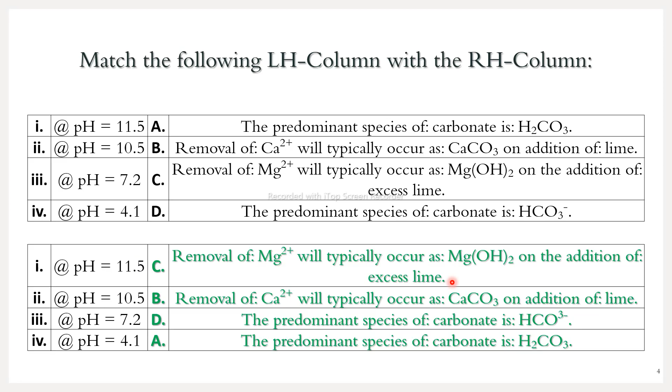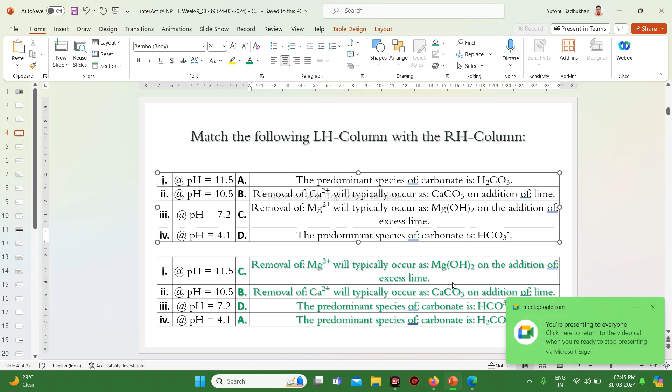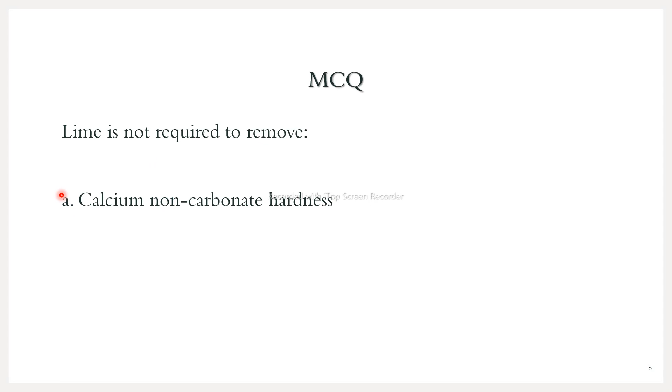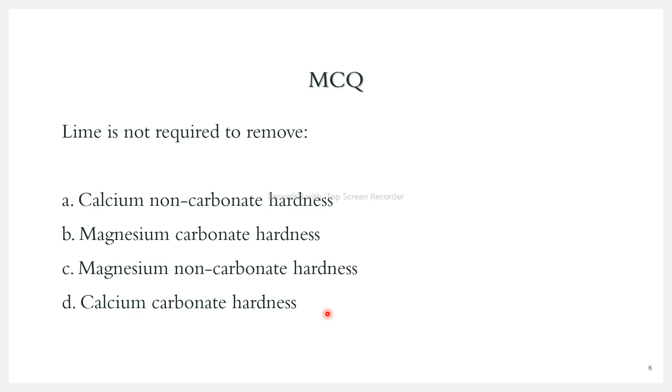Now the next MCQ is: lime is not required to remove option A, calcium non-carbonate hardness; option B, magnesium carbonate hardness; option C, magnesium non-carbonate hardness; and option D, calcium carbonate hardness. So the answer is calcium non-carbonate hardness. Lime is not required to remove calcium non-carbonate hardness, but in all the other cases - magnesium carbonate hardness, magnesium non-carbonate hardness, and calcium carbonate hardness - lime is required to remove these three.

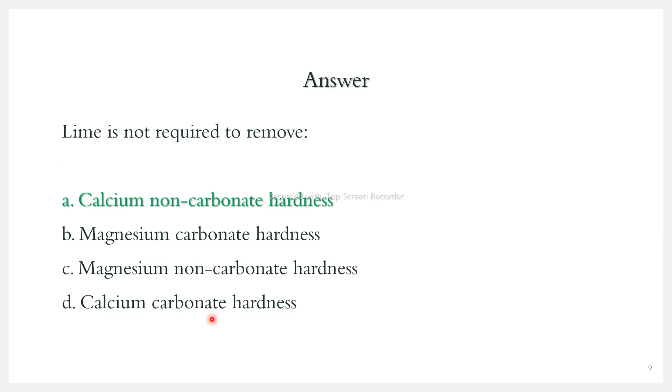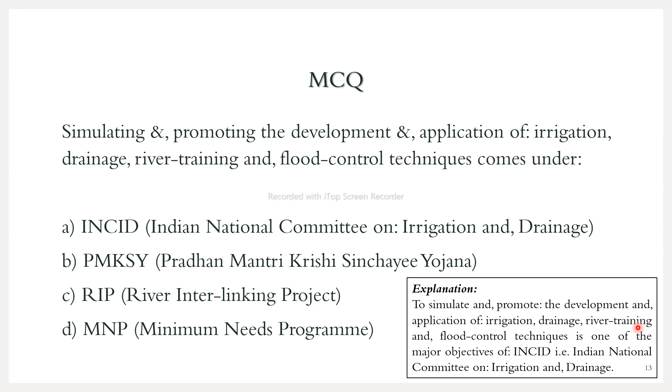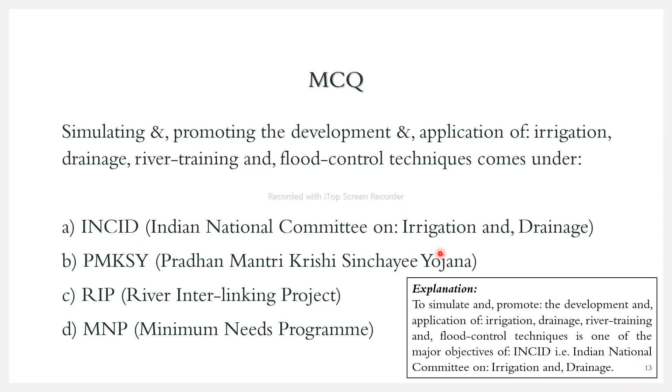The explanation is: to simulate and promote the development and application of irrigation, drainage, river training, and flood control techniques is one of the major objectives of INCID, Indian National Committee on Irrigation and Drainage. So option A is the correct answer.

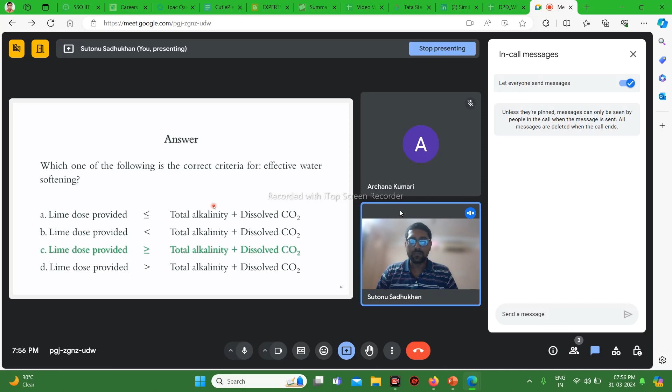Okay, I'll wait for some minutes for you to answer the next MCQ. Which one of the following commissions recommended to make water a union subject? Option A, Sarkaria Commission. Option B, Punchhi Commission. Option C, both Sarkaria Commission and Punchhi Commission. Option D, neither Sarkaria Commission nor Punchhi Commission.

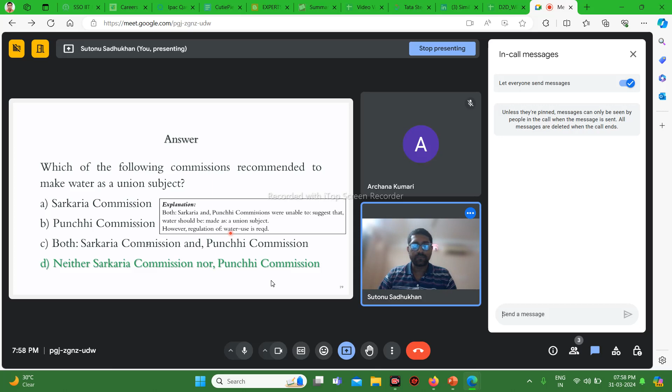Basically, water research or wastewater treatment is an interdisciplinary subject, not dedicated to any particular discipline. Okay, so now next.

Now you have to identify whether the following statements regarding NWP, National Water Policy, are correct or not. Statement 1: highest priority allocation should be for environmental needs to maintain environmental flows. Statement 2: water institutes should be restructured and made multidisciplinary.

So what is environmental flow or e-flows basically? If there is a river flowing from its source to the region where it meets the sea, and there is a certain industry or huge population located upstream, they will use up most of the water by putting up a dam or something for irrigation purposes or whatever. But what will happen in the process is the downstream portion of the river will get dried up. There might be other populations living on the downstream banks of the river.

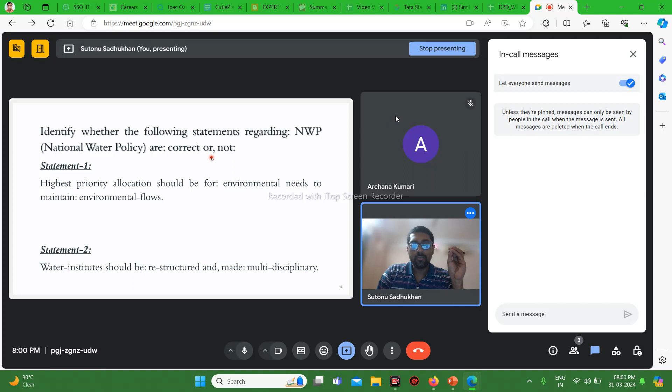Their livelihood is dependent on the water at the downstream portion, and the aquatic life will also be hampered. That's why environmental agencies have fixed that if the river has such and such criteria, with water flowing this many meter cube at the source, then at the downstream portion also a certain minimum flow must be maintained to maintain the livelihood of people around the river in the downstream region, and also to maintain the aquatic life there. So they put a limit that you cannot withdraw water from the river beyond this level, to maintain the environmental or ecological flow in the downstream region. So this is the concept.

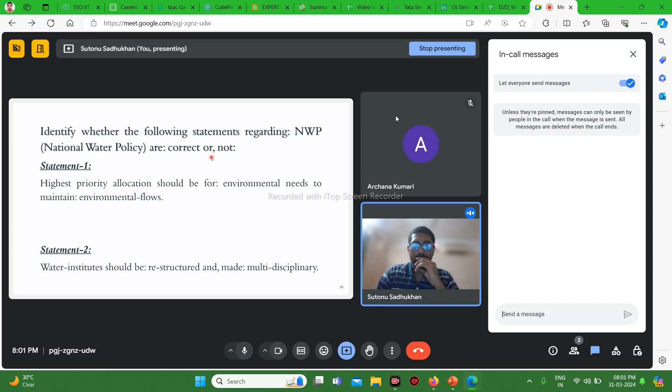And regarding the multidisciplinary concept, I told you water research is basically a multidisciplinary concept. Okay, so let's see.

So the explanation is, in the National Water Policy, drinking water is given the highest priority. So though option 1 is correct by itself, it was not part of the National Water Policy. As per the National Water Policy, drinking water has been given more importance than environmental flows, because national policies are made keeping public demand in mind. The aquatic life and everything, they are not going to give votes. That's why for such policies, drinking water, which is a public demand, has been given the highest priority.

But statement 2, that water institutes should be restructured and made multidisciplinary, this is a correct statement, stated in the National Water Policy. So next MCQ is: Jal Jeevan Mission aims to provide piped water supply to all the households across the country by option A 2024, option B 2030, option C 2032, or option D 2022.

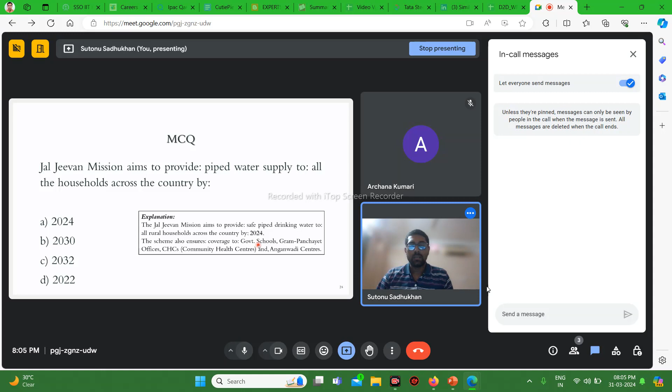Okay, so now our next. So for the Jal Jeevan Mission question, the answer was 2024. Within this year only, the Jal Jeevan Mission aims to provide piped water supply to all households across the country.

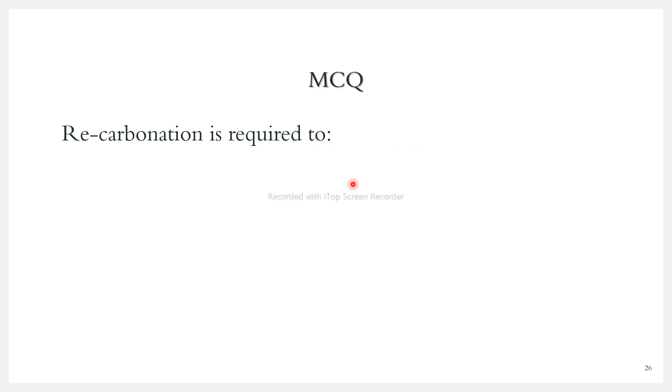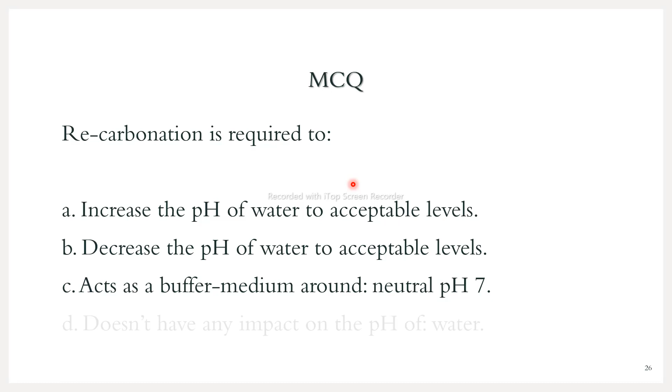Next MCQ: recarbonation is required to A. Increase the pH of water to acceptable levels. B. Decrease the pH of water to acceptable levels. C. Act as a buffer medium around neutral pH, that is 7. D. Doesn't have any impact on the pH of water.

So carbonation, this thing I actually discussed in one of the MCQs earlier when I was recording the initial class. Carbonation is when carbon dioxide is dissolved inside the water and forms carbonic acid, which is detrimental. Any kind of acid is detrimental to calcium oxide or things made of metals, so they are corrosive in nature.

So you can imagine if recarbonation is done, what will be the nature of the pH of the water. Please give me the answer, I'll wait for 2 minutes. This is a conceptual question, not a memory based question.

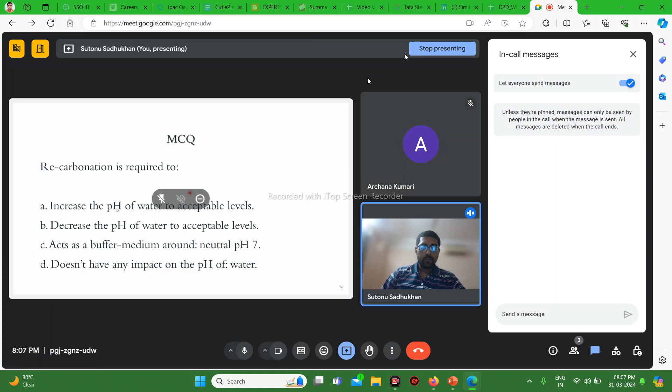Okay, so I'll proceed with the answer. So, decrease the pH of water to acceptable level. This is why the recarbonation is required.

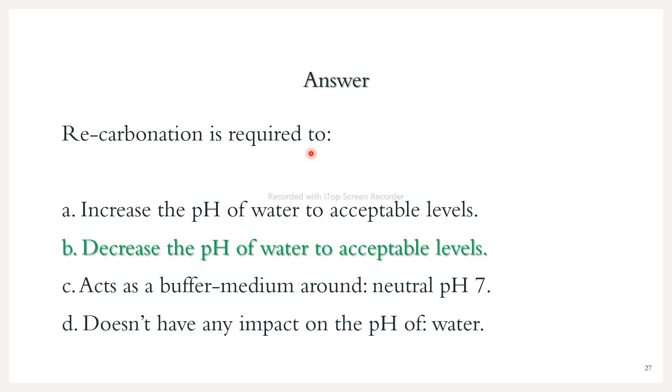Now next MCQ. In the Central Groundwater Authority or CGWA notified critical areas, groundwater development is regulated by A. Concerned deputy commissioners or district magistrates, B. Secretary of Irrigation Department of concerned areas, C. Principal Secretary of the concerned states, and D. Municipal or Panchayat authorities of concerned areas.

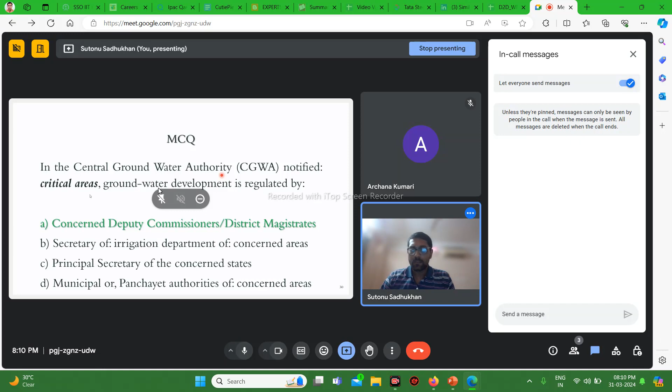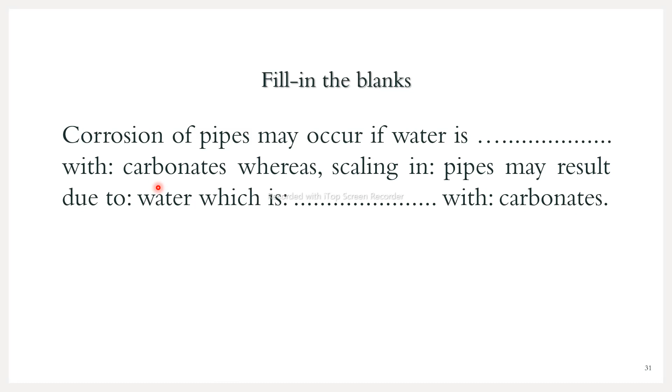Okay, so let's move on to our next, fill in the blanks. Corrosion of pipe may occur if water is dash with carbonates, whereas scaling in pipes may result due to water which is dash with carbonates. Option A, undersaturated and supersaturated. Option B, saturated and undersaturated. Option C, supersaturated and undersaturated. Option D, undersaturated and saturated.

Corrosion of pipes may occur if water is at what saturation level with carbonates, whereas scaling in pipes may result due to water which is at what saturation level with carbonates. You have to mention the saturation level. Carbonates in water may present at three saturation levels: undersaturated, saturated and supersaturated, right?

So if the water is saturated with carbonates, do you think corrosion or scaling will occur? What do you think? This is a conceptual question, I will wait for 2 minutes.

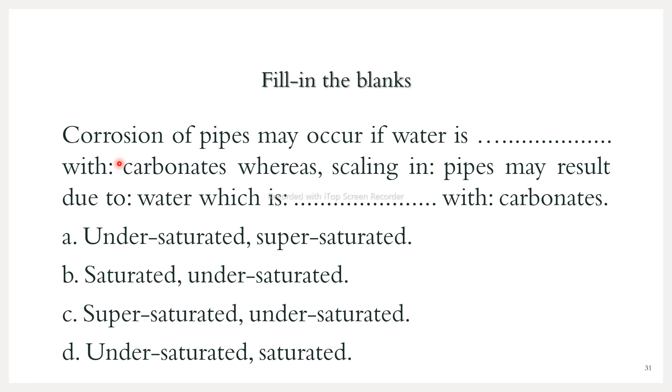Now let's say if it is supersaturated, oversaturated with carbonates, that means the ion holding capacity or mineral holding capacity of water has been exceeded. So the excess amount of carbonate will get deposited and scaling will occur. So now can you answer? Also no?

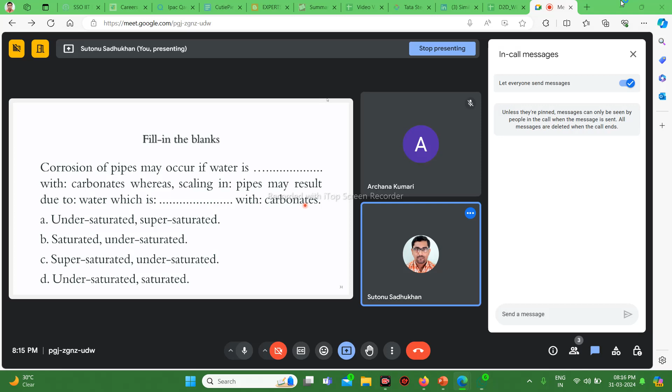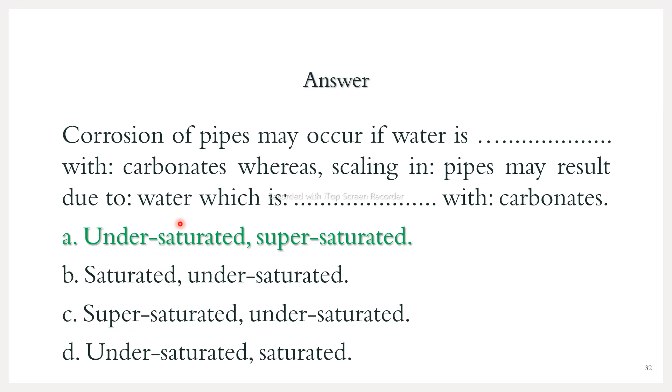Okay, so I move on to the answer. This is the correct answer. If the water is less than saturated, that is undersaturated with carbonates, then corrosion of the pipes will occur because the material of construction of the pipes will get corroded, and that will add to the water to fulfill its saturation capacity. And if the water is supersaturated with carbonate, the excess amount of carbonate causing the supersaturation will get deposited on the pipe, and the inner diameter of the pipe will get reduced as scaling increases.

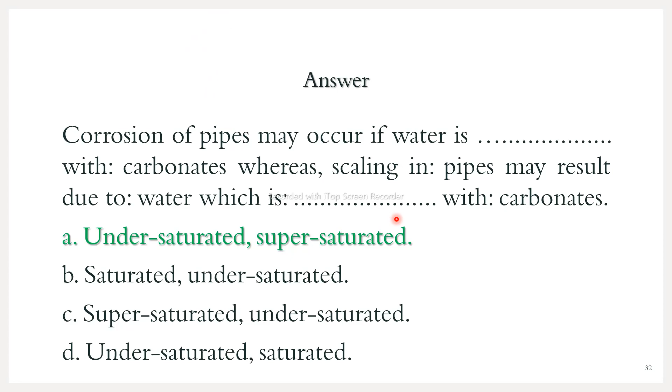Hope it is clear. So now next there is a problem. A flocculation chamber has 12-meter long and 0.25-meter wide paddles. Both the paddles are supported parallel to the horizontal shaft. The shaft rotation speed n is 6 rpm. Center line of the paddle from the shaft is 1.8 meter. Coefficient of drag CD is 1.8. The ratio of the velocity of paddle with respect to the water to velocity of paddle from a fixed coordinate, k, equals 0.75. The power consumption by shaft in watt, rounded to the nearest one decimal place, is what you have to calculate.

Now this is basically a formula-based problem. If you know the formula, you will be able to calculate; if not, you have to memorize it. There is a formula for power based on the power number, which is a dimensionless number, but the power number itself will not be discussed here—only the power formula will be used. So I'll wait for 2 minutes. Calculate and give me the answer, otherwise I'll move on to the solution.

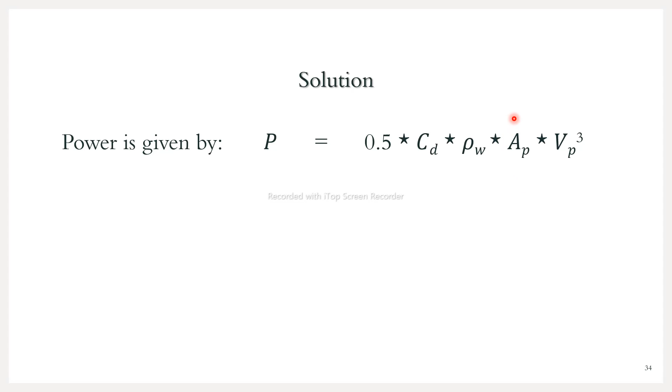So let me tell you the formula. Power is given by P equals half of CD into rho W into AP into VP cubed. CD is given in the question as coefficient of drag, rho W is given as the density of water, 1000 kg per meter cube. AP is the projected area, and VP is the velocity of the paddle with respect to the water. These data are given to you, so note down this formula: P equals 0.5 into CD into rho W into AP into VP whole cube. Power is directly proportional to the cube of the velocity of paddle with respect to water. Is the velocity of paddle with respect to water given in the question?

Yes, rotation speed in RPM is given, so from that you have to calculate the velocity of the paddle, or maybe with the help of K you have to calculate it. So I'll move on to the solution after 1 minute.

So you have to note this down: this is the dimension of the paddle, length is 12 meter, breadth is 0.25 meter. If you multiply them, it will be around 3 meter square area—that will be the projected area, AP. CD is given as 1.8, rho W is 1000 kg per meter cube, and with the help of these two you have to calculate the velocity.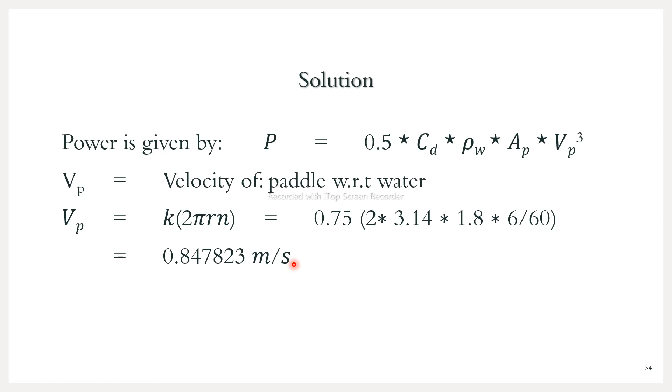So next, the projected area AP will be 12 into 0.25, that is 3 meters square. As I told, it is the length of the paddle and it is the breadth of the paddle. You just multiply them, and however it is shadowing the water, that is nothing but the projected area, 3 meters square. Because the movement of the paddle will be perpendicular to the flow of water, you have to take the perpendicular area to the direction of the flow of water. That will be your projected area, basically.

So now the power, as the formula gives, will be 0.5 into CD, that is 1.8, into rho W, that is 1000 kg per meter cube, into AP into VP cube. AP will be your 3 meters square, and VP will be... this cube. So it came out to be 3290.6 watts.

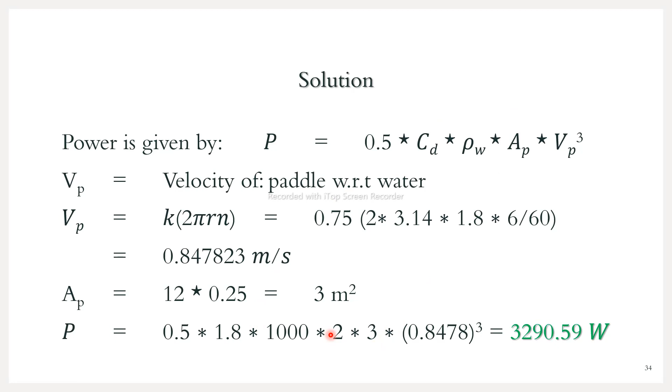How did these two come into the picture? Yes, because the projected area has two sides, so that's why. One paddle has two sides. That's why this came into the picture. Yeah. Thousand. AP is 2 into 3, and VP is this one. Right, so if you simplify it, it will become something like this.

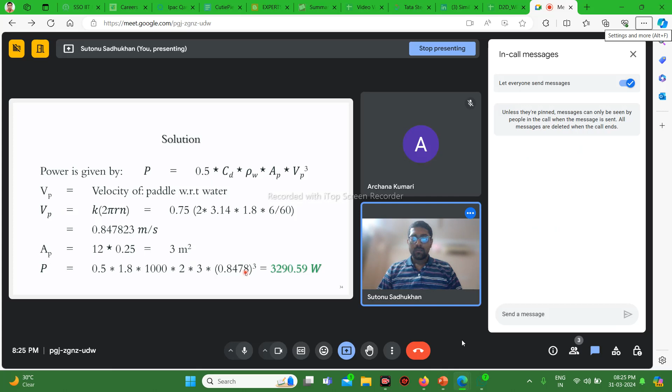So now the last problem of today's session. I told you I'll be letting you go at 8:30. So the problem goes something like this: a water treatment plant in a town is proposed to be expanded, so it is a brownfield project. Whenever there is a new plant being established, that is called a greenfield project. And if there is a capacity expansion of an existing system, that is called a brownfield project.

The new design flow rate is 1 meter cube per second. A deep bed granular sand filter with a design loading rate of 600 meter cube per day per meter square is to be used. If the area of each filter box is limited to 50 meter square of surface area, how many filter boxes are required? If the answer comes in fractions, answer to the nearest integer. Now it has another part: if one of the filter boxes is out of service, will the new loading rate exceed the design loading rate of the filter? This is the question.

So I'll wait for 5 minutes. Please calculate and tell me the answers.

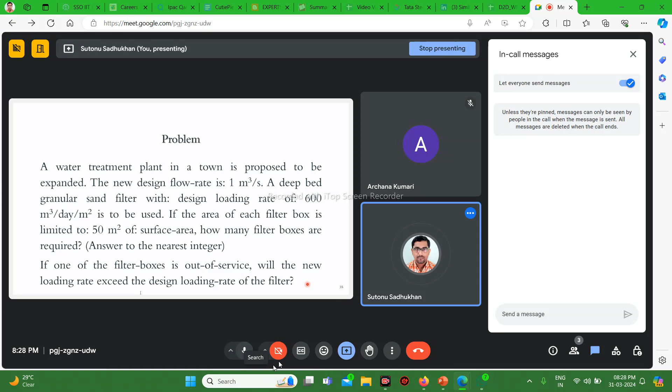So in the question, what you need to do is basically find the total surface area. If you are able to find the total surface area, then you divide it simply by the area of each filter box, and you will get the number of filter boxes required. So if the total area is, let's say, A, then A by 50 meters square, rounded up to the nearest integer, will be your answer for the first portion.

How do you get the total surface area? If the design loading rate is given, it is basically not loading rate, it is your flux, because meter cube per day per area is your flux. So let me correct it, providing a bracketed term here: it is your flux, not your rate in that sense. So loading rate, within bracket, is flux.

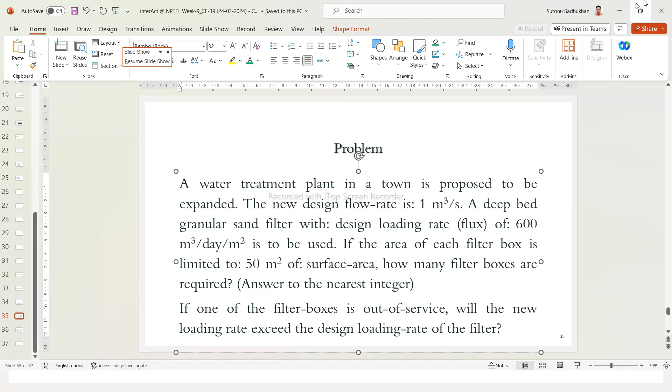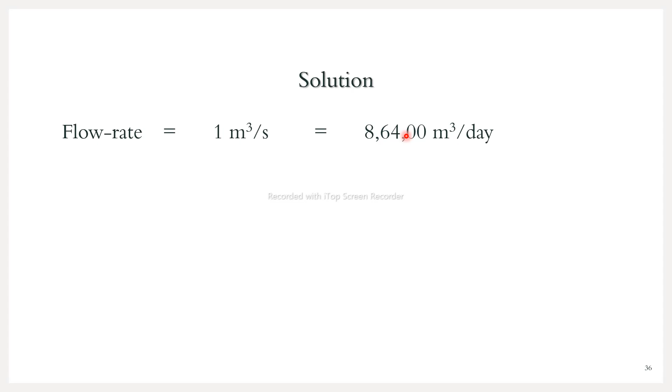Okay, so I will move on with the solution. The flow rate is given as 1 meter cube per second, which, if you convert into day, will be into 3600 into 24, per hour per day. In this way, it will come out to be 86,400 meter cube per day. Now, total area required will be 86,400 divided by 600, equals 144 meter square. Do you understand how we are getting this?

So the flow rate is given, and you divide the flow rate with the flux. The flux unit is given as meter cube per day per meter square, so meter cube per day gets cancelled out, and meter square comes in the denominator. In this way, the total area required we get is 144 meter square by dividing the flow rate with the loading flux.

Now the individual box area is given as 50 meter square, and the number of filter boxes required is 144 divided by 50, which is approximately 2.88, which is approximately equal to 3. So 3 boxes will be required. Hope it is clear, very easy question.

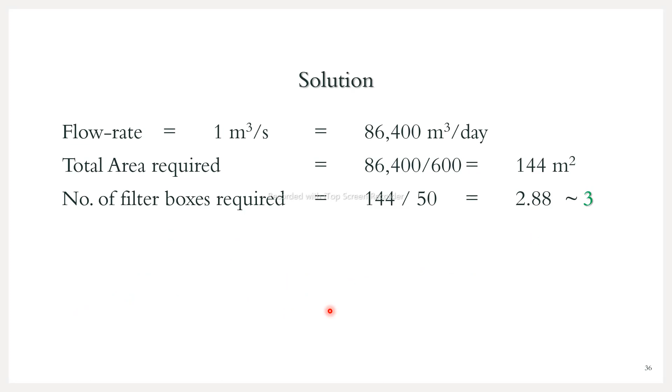So what is the design loading rate? It is 600 meter cube per day per meter square, and you have to calculate the new loading rate to check whether it exceeds the design loading rate or not. Now one of the filter boxes is out of service, so the total area available is not 144 now, it is 100. If one box is out of service, n, the number of available filters, is 3 minus 1 equals 2. Area of filtration provided by the 2 filter boxes will be 2 into 50 meter square equals 100 meter square, since each filter box has an area of 50 meter square.

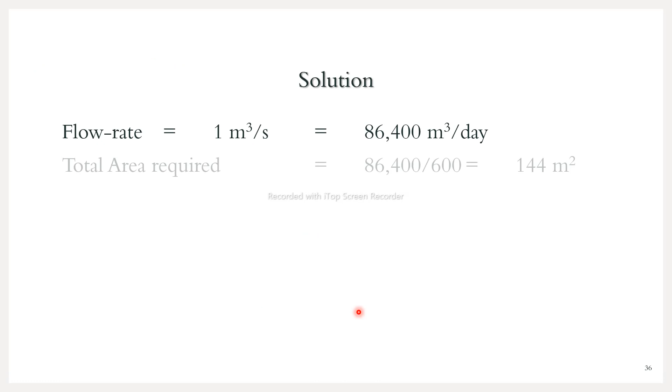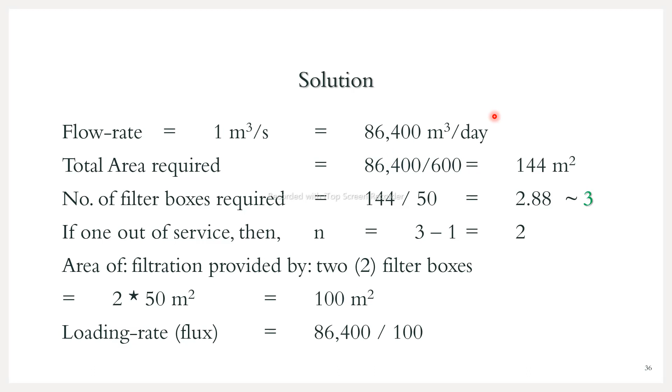Now you have to calculate the loading rate with respect to the area. So loading rate is nothing but the loading flux. It will be 86,400 divided by 100, where 100 is your area, the area of the total filter boxes, and flow rate divided by area gives you the loading flux. This is nothing but 864 meter cube per day per meter square, and the design loading rate is given as 600 meter cube per day per meter square.

So it is clear from the question that if one of the filter boxes is out of service, then the loading rate we get will be more than the design loading rate. That means the filters will be overloaded.

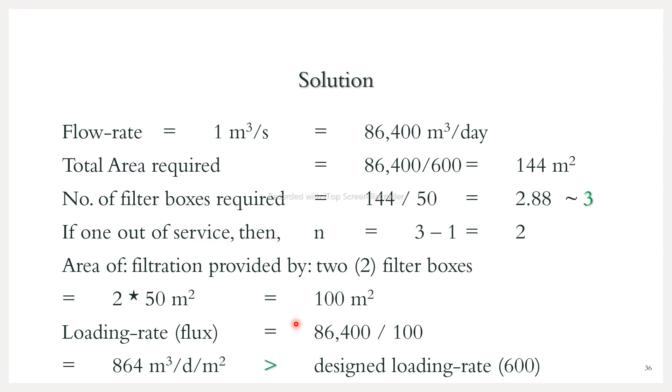So if someone tells you what should be the design, as the designer you have to keep four boxes, so that if one is out of service, it doesn't become overloaded. If one of the boxes is out of service and you are repairing that box, you keep it as 3+1, meaning one is in standby mode. If one of the three boxes becomes out of service, you switch on the other one, and again it maintains three, so the loading rate stays less than the design loading rate of 600. And again you repair that one, and keep it in standby mode. So 3+1 will be the correct design.

Okay, so hope it is clear, today's class. If you are having any question, you can ask.